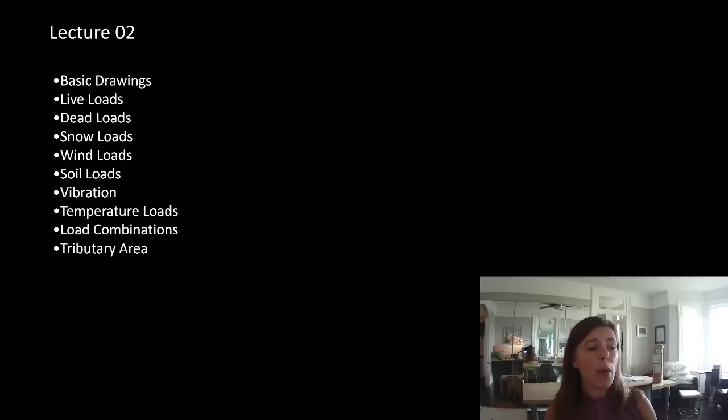So today, we're going to look at the drawings, we're going to look at loads, and then we're also going to look at how we combine those loads to get that load side, or that factored load side of our equation. And then we're going to talk about tributary area and tributary width. So this is basically how much of something loads up another thing. And this is where I think intuitively most of you have a good sense of these things.

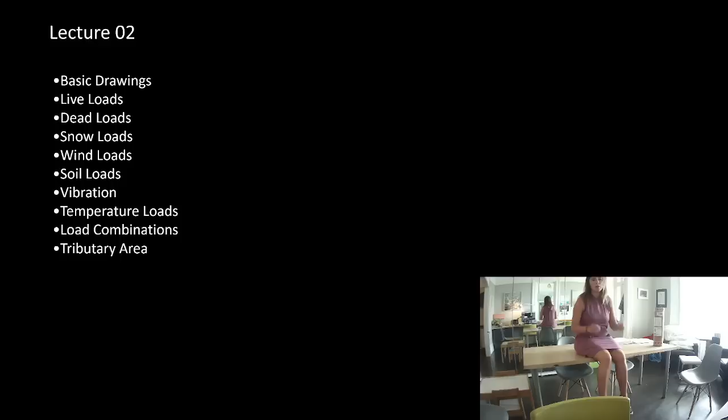For example, I have this table right here. If I asked you what percentage of this table went to this leg, and what percentage went to this leg, and what percentage went to that one, you would know that it's about 25%. You know that if I sat in the middle of this table, half of my load is going to this side, and half of my load is going to this side. You intrinsically and intuitively understand tributary areas and tributary widths.

We're going to talk about that, and we're going to do some quick calculations that look at those. So we are going to do some calculations today, not a lot, but we will do some. So let's start digging in here. So I've already commented on this. I have posted for you Varsity Goldring Centre for High Performance Sport. The architect, MJMA, and Patkau have allowed me to post their drawings for you, and the structural drawings that I did when I was at Blackwell. If you ever get the opportunity, go check out that building.

It's gorgeous. Cube Lofts was done in 2007, and it was a unique project in that we did it out of steel because that was economical and it made sense for that project. We tendered the project, which means we send it out in the world and different contractors say how much it'll take for them to build it. In that 3-month time frame, the steel commodity prices went bananas. Now, that was an unusual circumstance back in the day, but we're seeing that same thing with wood and pretty much all building materials right now.

Then it was because of the Beijing Olympics. A huge portion of structural steel in the world was going to China for mass construction, and the prices in North America for a period of 3 months almost doubled. So we had to redesign the project in concrete. Some small architectural changes happened in that time, but not many. By the time the concrete project was actually tendered, steel had dropped back down and it would have been cheaper to do it in steel. But we have 2 sets of drawings for that project now. So those are all available on Quercus.

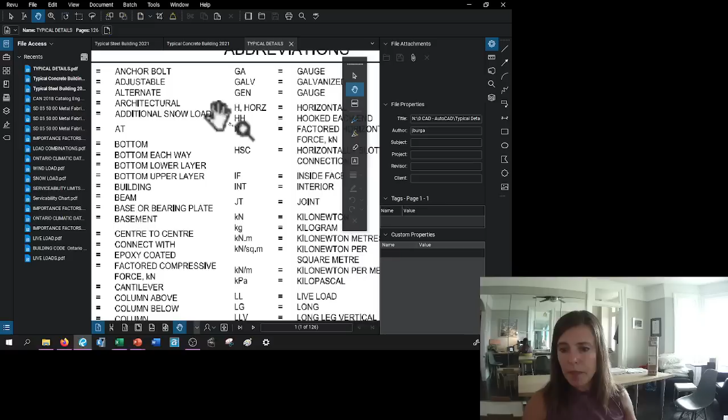So this is my typical details for abbreviations. So you can see that we've got some common abbreviations here. I'm going to go back to our lecture, because I have identified some of the ones that are going to be really important for us in this course. C/C means center to center. So how often does something occur? Or on center, OC.

CANT. is cant, which is the abbreviation for cantilever. CA means column above. GA usually means gauge. KN, kilonewtons, that's going to be a unit of measurement that we are going to talk about in a few minutes. MC is moment connection, or MOM is moment. This is that bending force that we talked about. So if this is bending, it's also called bending moment. So we refer to that bending force as moment.

I realized in last week's lecture, to me, bending and moment are the exact same thing, and in the lecture slides, I referred to it as bending, and then in the assignment, I listed it as moment, and you obviously couldn't have known that, or some of you did know it, some of you did figure it out, but it's not really fair that anyone would be penalized for not knowing that.

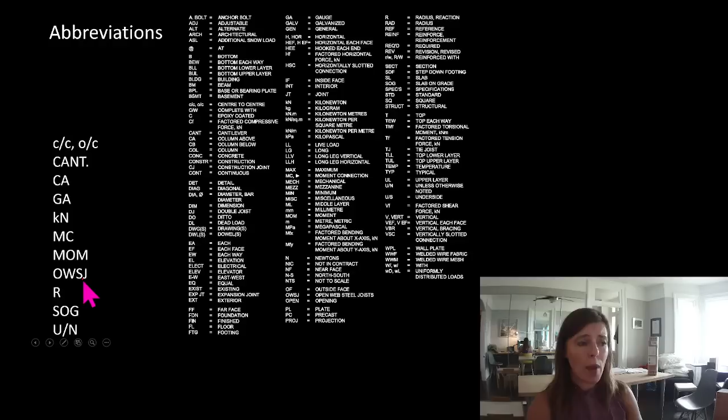Open web steel joist, OWSJ. I'll show you an open web steel joist in just a second. R for reaction. SOG is slab on grade. And U/N usually means unless noted. So we'll say something's typical unless noted.

The ones that are really important in this course: you can see here, this says a big C with the sub F. That is our factored compressive force in kilonewtons quite often. So C for compression, and that sub F means we factored it. Same for MF, that means our moment is factored. We have VF, that's our shear, factored. Any of those with the subscript R means resistance. And this one is tension, so TF is our factored tensile force. We're not going to do torsion, but factored torsional force is listed there.

All right, if we are cutting through something in a section, so if I was looking at a plan of this table, I'm looking down at it, that's a plan drawing. If I have a section, it means I'm cutting through this table. Anywhere I'm cutting, so if I have a section right here, looking that way, I have cut through the table material, but I'm looking at the legs beyond. So anything you cut through, you would hatch it. And hatching it means you draw it in to say that you've cut it. And the hatching can give you an indication of what the thing you're cutting is.

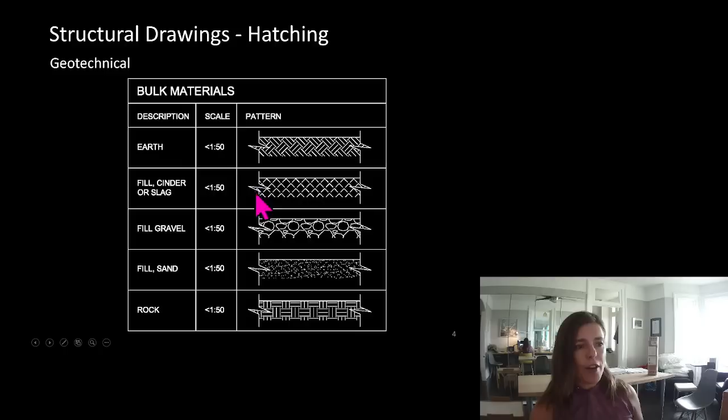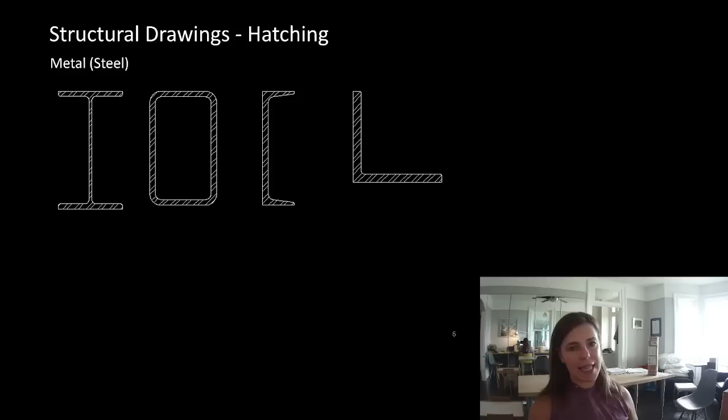Okay, so I have created, I've called it a typical building. It is not a practical building at all. I am definitely not an architect. My building is a very bad plan. It is a very bad idea, but it is structurally sound. I have done an analysis on it, I have a model of it, and I have sized everything, and I have drawn it for you.

So the things I really want you to be aware of, and I'm going to open it up in the PDF, but the things I want you to be looking for: the grid identification, grid dimensions, labels. We label things. What are the size of the elements that make up the building? Remember, the whole point of these drawings is to be able to tell someone how to build the building. I should be able to hand over my set of drawings and walk away and never look back, and somebody should be able to build it.

They should be able to know what me as the engineer and you as the architect came together to draw to be built in the real world. What the framing is, we should be showing the gravity system in plan. We should be showing the lateral load resisting system. What's the lateral load resisting system? That's the thing that stops it from tipping over. And we should be showing the cantilevers. Actually, I just want to see if I have it right here.

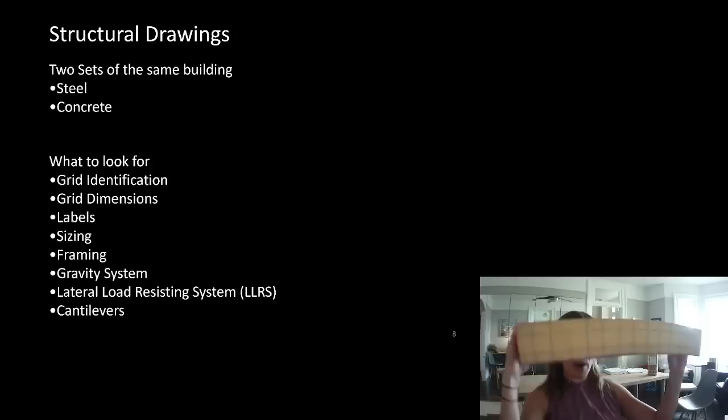And we would often identify cantilevers. So cantilevers are, so this is supported at both ends. This has a cantilever. I've pulled the support back, and this part right here is a cantilever.

All right, let's take a look at our steel drawing. So typical steel building. All right, so this is my steel building that I've created. It's Hilchian Engineering. I have all of the information. I've labeled what it is down here. I've shown what it is, what drawing number it is, and the intent of what I'm showing. Let's come out over here. This is the foundation plan. So if we have a building, for the foundation I am cutting just above the foundation and looking downward.

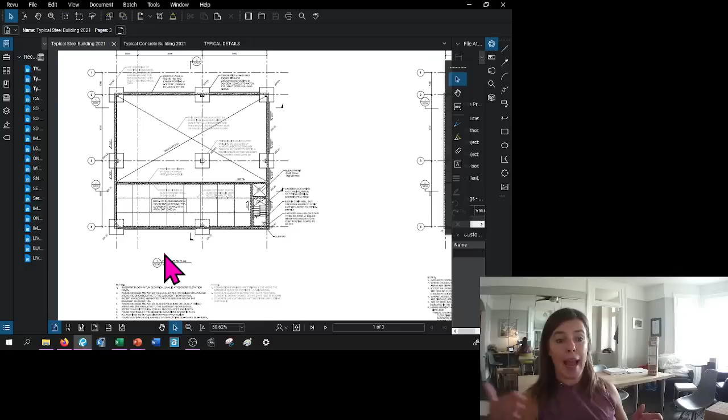Each year I add a little bit to these drawings. You know what, I'm going to flip to a section just to show you what I'm talking about here. My foundation plan is a line right here looking down. My second floor plan will be a line here looking up.

All right, so foundation. I'm cutting just above my foundation and looking down. So there's a huge zone that's unexcavated. It looks like right here we have no basement. We have nothing here, but look at this. Over here, we have a basement right here. So this is a 150 slab on grade. So slab on grade is the thing that sits directly on dirt. We have grids, and we have the dimensions between the grids. We have concrete foundation walls and something showing SDF. That's a step down footing.

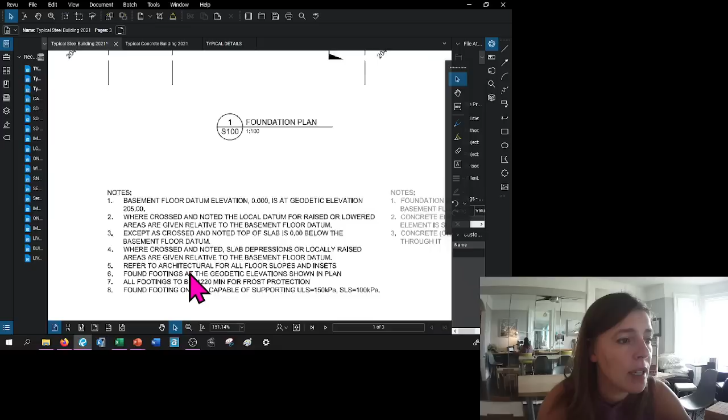We have these foundations here. Let's take a look what it says about our foundations. We have notes down here as well. So found footings at the geodetic elevations shown in plan, all footings to be a minimum 1.22 meters down for frost protection. That is standard in southern Ontario, and we'll talk about that later in the term. But that means these foundations here are down just below grade, about 1.2 meters down.

But these ones need to go down deeper because we have a basement. So we have to dig down deeper. We don't just go along and do a straight line and go down. We have to slowly transition down to that deeper footing. So that is indicated here with a step down footing. So we have piers on footings, and I'm going to show you sections through this, and you should be taking the time to take a look through these.

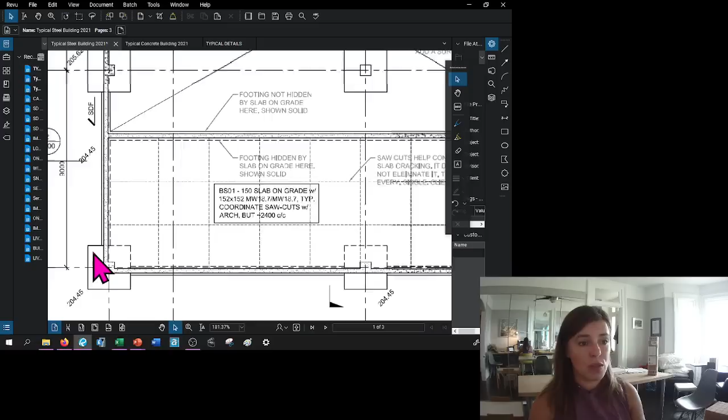You know, the intent is that you're already comfortable and familiar with drawing sets, whether it's architectural or structural. The assumption is already that you can read them. I think that's a bit of an ask to assume that you already know all that. So that's why I'm taking this time to go through this, and that's why I've drawn these drawings. So saw cutting, it's about crack control.

So the dark notes are the things that would normally be on a drawing set. The grayed out notes, or the lighter ones, were ones that I just thought might help you understand what's going on. So I've taken the time to kind of indicate it there to benefit you in some way.

All right, the next plan is our ground floor framing plan. So we're cutting just below the ground floor and looking up. Before we were cutting and looking down, and now we're cutting and looking up at the ground floor. When we were looking at the foundation, there was no basement, so we were cutting through dirt and looking at the foundations, except for where we had a basement and where we had our stairwell going down to the basement and our elevator pit.

Here, we're cutting and looking up at the ground floor, or something called a reflected ceiling plan. So we're cutting through our concrete foundation walls still, so we're still somewhere down in the dirt, but now we're cutting and looking up. We have our elevator here and our stairwell here, and you can see we have doors here because we're cutting through, so we're not cutting through a hatched part anymore because there's a doorway there.

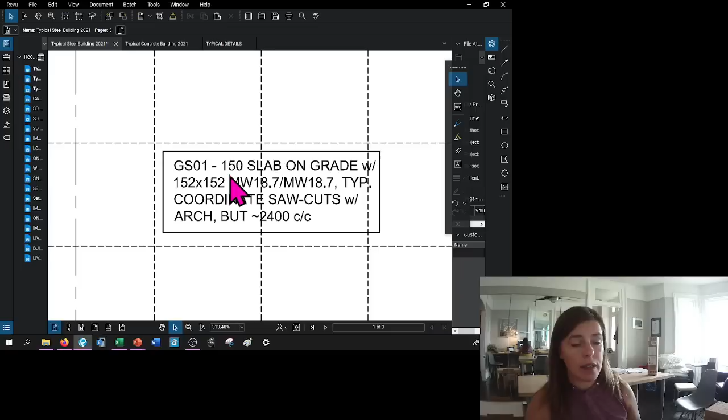All of this zone now is our slab on grade. So that's some concrete sitting right on dirt. It's supported everywhere. So instead of being our table like this, it's if we took the legs off and set it on the ground. It is fully supported everywhere. Over here, above our basement, we have 64 concrete on 38 metal deck.

Now, there's a lot of terms I'm going to throw at you here, and you're not going to know all of this information. We are going to go through each material in a separate week of, I think we spend 2 weeks per each material, where we look at what's typical, what all of these terminologies mean. Right now, I'm just trying to show you a lot of information on the drawings. We're not going to stop and explain it all. This will be helpful when we come back to it, when we start to talk about structural steel.

The idea here, though, is that I've labeled this. The metal deck spans from here to here, and then from here to here, and then from here to here. So it is like, well, you know what? I have a piece of paper right here. I am going to do something that looks very similar to my metal deck. All right. So I've badly folded this piece of paper.

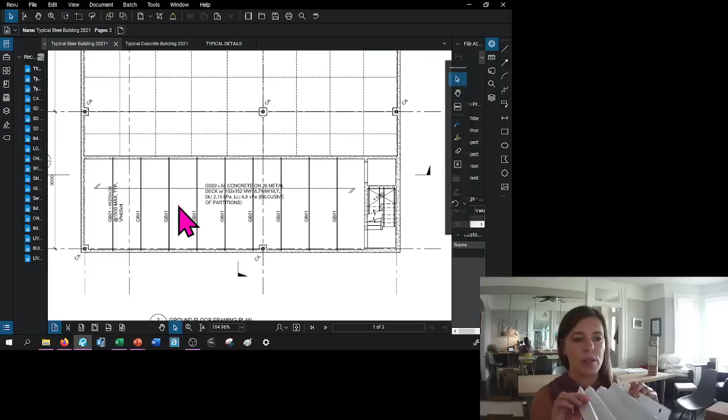Paper by itself doesn't span a very far distance. Paper like this wants to crumple like this. Paper like this, because I folded it, is now very stiff. Look at how far it goes without trying to crumple. Turn it this way and it tries to crumple. That is the idea of metal deck. This is the direction that it spans. So this is matching the arrow here like this.

This deck would get supported on a series of elements. So I'm going to be very weird with this. All right, so the deck would be spanning. All right, so if this is our deck, we would have something here, and something here, and something here, and something here, and something here supporting it.

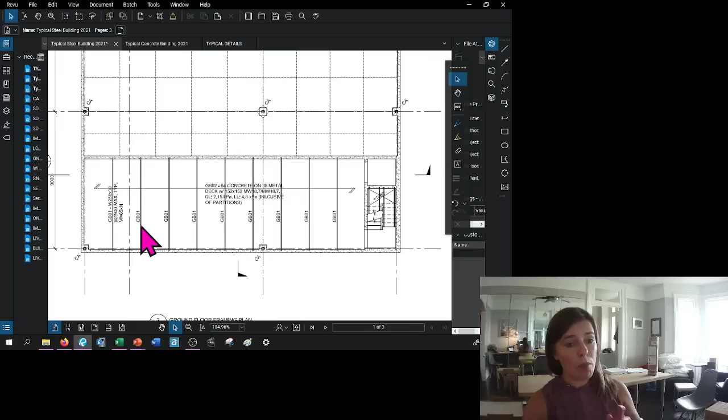So it comes in one big long piece, but if this represents my beam, it is picking up this amount of deck. And this beam here is picking up this amount of deck, because the deck is spanning in this direction. We will talk more about that later today, and again when we talk about each of these specific materials.

So we have notes here. We have a column schedule that shows us our columns. So we have what size it is. We have it labeled. So look at this, A2, column at A2. Let's find where A2 is. So it looks like we're talking about this spot right here. See this CA? That means column above.

So it looks like our steel column starts somewhere around the ground floor and goes up. Let's verify that with our column schedule. Look at this. Oh, our column starts right here, just around the ground floor, and goes up just to level 2.

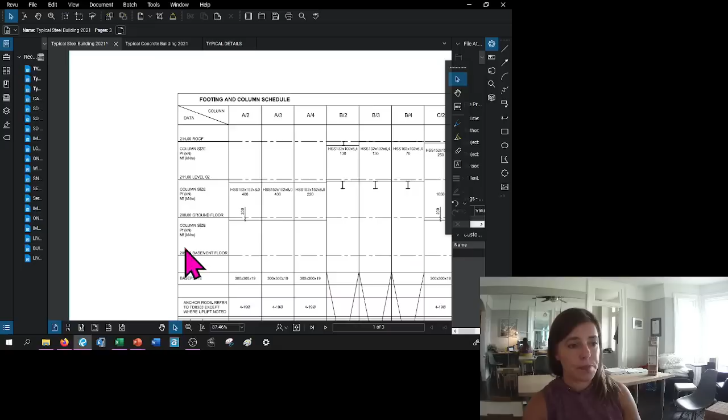So let's look at our second floor plan. So this is cut looking up now. So we have our big space here. We have our elevator and our stairwell here. We have a few things happening here. It looks like we have an outline of our building right here. This dashed line is our architectural line showing us the extent of our building. It looks like this zone here is a roof, and this is a floor. So it looks like this is a low portion on our building.

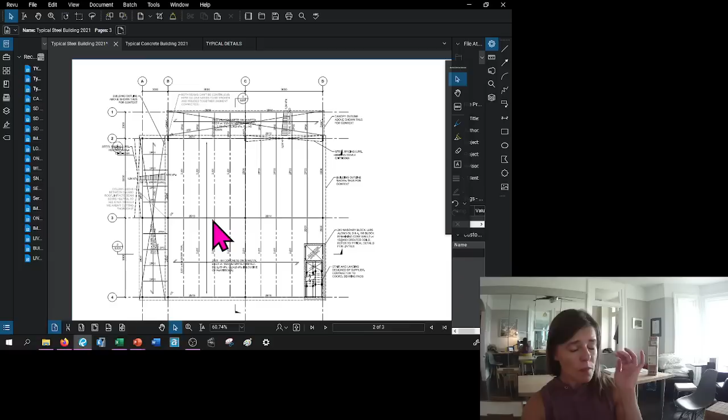We have something here. It looks like this is our snow load. This is representing our snow load. We have beams and something called a purlin here. Ooh, look at this. Column above. That seems like it's going to be messy. We have this 2B13 spanning from one column all the way over to another column with a column above on it. That looks like that beam is doing an extra big hard job. We will reference that when we start talking about how we estimate sizes of things.

Over here, we have something that says 240 masonry block LLRS, or lateral load resisting system. Remember how I said it could be a braced element? Well, it could also be that we have not just something floppy like this. I wonder what are the odds that my calculator, oh, look at this. So my calculator fitting in there stops that from racking as well. Imagine if my calculator fit in there perfectly. It could be a shear wall, or it could act as the lateral load resisting system.

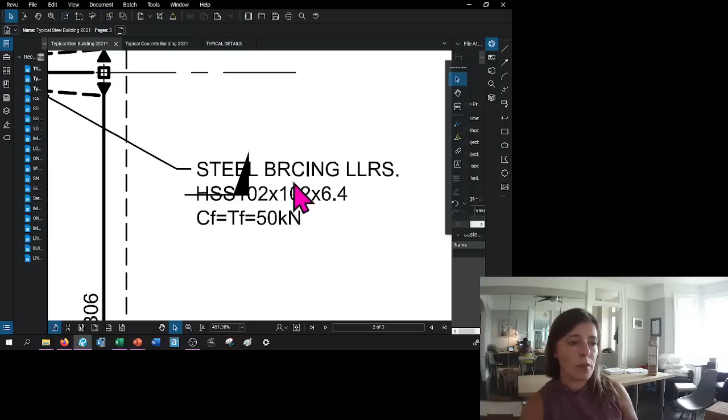So when we build solid walls out of a material that we can use as a lateral load resisting system, we often do that. So plywood on wood framing houses, for example, block and concrete walls in buildings we would use as lateral load resisting systems. It looks like we also have these dashed lines here. This says steel bracing, with bad spelling, lateral load resisting system. And it tells us what size it is. Oh, look at this. CF equals TF equals 50 kilonewtons. Or the factored compressive load equals the tensile factored load equals 50 kilonewtons.

What they're saying is that whatever load is acting on this could go this way, or it could go this way. So if it's trying to go this way, it's going to squish this column, or this brace element. If the load is going that way, it's trying to pull. Oh, look, I actually broke it apart. I actually pulled it apart there. So it's trying to pull it, and that would be our tensile, or our tension factored load.

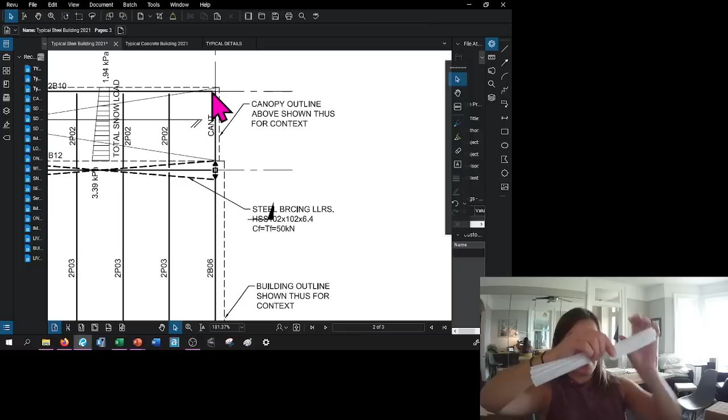See these dark triangles here? That is representing a moment connection. And look, we have CANT, or cantilever. So it looks like this beam comes along, gets moment connected through here, and cantilevers out here. We can do two things. If this is going to represent a beam now, when we have a cantilever, we can continue it over the top of something, and it cantilevers over. Or we can break it apart, and at that point, connect it back together.

Why would we break it apart and connect it back together? Well, sometimes maybe we want that cantilever bit to be a shallower piece, and we need to moment connect it and then support it. That is exactly what's happening here. See this cross line? It says minus 250. This zone here, the underside of the metal deck, is dropped 250 millimeters in this zone.

Again, I know I'm saying a lot of words that you don't know. Take a breath. You don't have to know all these yet. I want you to start hearing them, but you don't have to know them yet.

My 5-year-old has just started French immersion this week. He knows no French.

And so I'm highly aware of how just hearing it get repeated is how you can learn. I'll also take the time to teach you, but I can't teach you everything on day one. So I'm saying a lot of things that you haven't learned yet, but by the time you learn them, they'll already sound familiar.

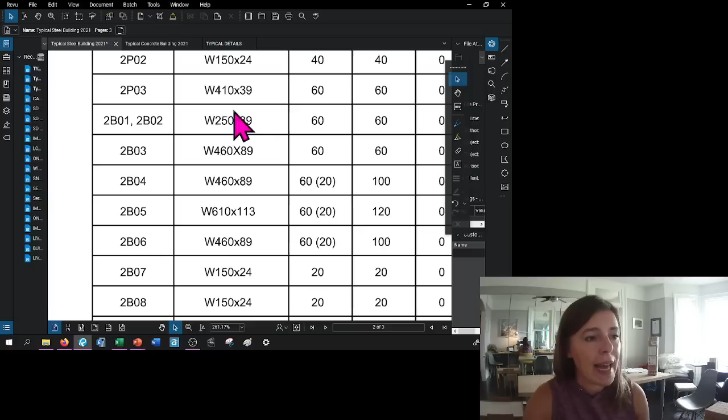All right, we have a beam schedule here. So these are the labels that we have, and they tell us what size section we have here. We're going to talk all about this and what these things mean. Look at this. We have reactions in kilonewtons. And if we look down here, it says design connections for axial force PF, end moment MF, torsion TF, or out-of-plane horizontal forces shown in the remarks column. In addition, the vertical shear is provided in the reaction column. And so these are all factored values.

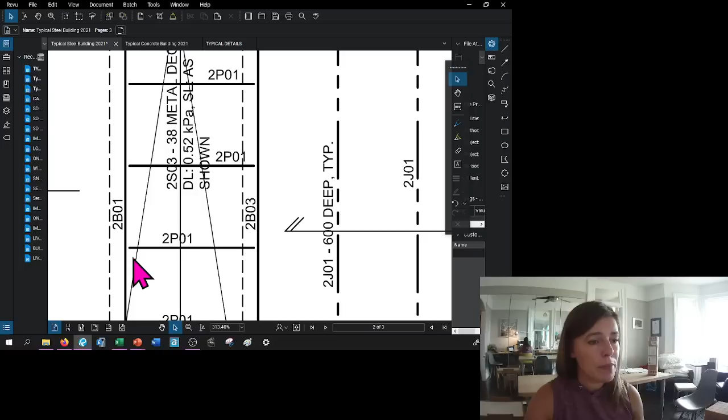And so this says 2P01 is a W150 by 24. Let's go find our 2P01. Oh, look at this. This is an element that spans from 2B01 to 2B03. It looks like it's supporting metal deck that spans in that direction.

Here we have our roof plan. So we have RJ01. See this funny dashing? We have a double dash. That is often the dashing we use for joists or open web steel joists. And I'm going to show you what that is in just a minute.

So take the time, look through these drawings, read them. I'm not going to go through every single thing. What I have added this year is sections. So if you go back, you can see this is a section mark, so I'm cutting through the building, looking that way. I'm cutting through the building, looking that way. Here are those sections.

So you can see this is the one where we had our ground floor or our foundation cut looking down, and then we cut looking up, we cut looking up, and we cut looking up. We have our next section where we actually cut through the elevator core. And you can see we have an elevator pit here that we called up on the plans.

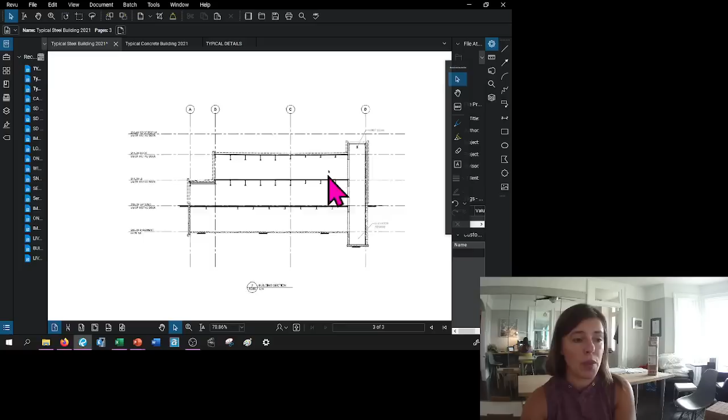And here's one where I show that moment connection through that column where we have a cantilever. So nothing picks up the end of this. So if we have nothing picking up the end of it, it can't be just a pin. It tries to fall over. We need something that grips it and stops it from trying to rotate or spin in space. And that's our moment connection here. But we couldn't just bring this one beam across because we needed it to drop down.

Here's our basement. There's the slab on grade that we had at ground level. Here is our concrete on metal deck and beams that we had at the ground level over a basement. And here are our open web steel joists. So these are at some regular spacing. And this is what an open web steel joist looks like. We're going to talk about all of these when we look at steel.

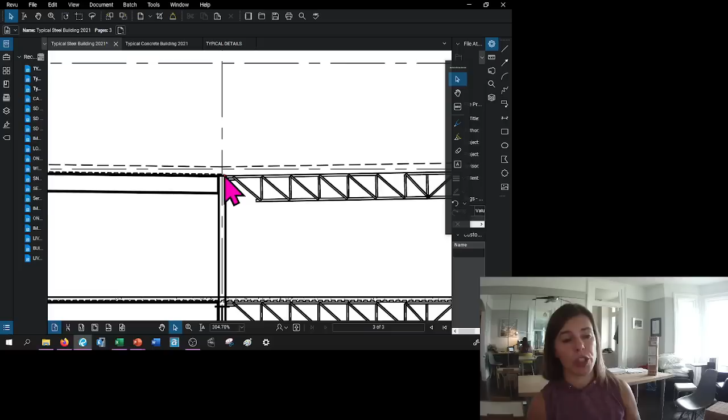You can see this open web steel joist and this beam are sloped down to a point. If we can, and it's simple, we will slope the top of the structure to help the architect to achieve their roof drains. Water wants to go to the lowest point, and so we build that in. And I'll talk about that a little bit when we get to loads as well. So that's our steel set of drawings. You can feel free to go through this on your own and take a look at them.

This is the same building as a concrete building. I will point out that with the steel, what we often do is we make our grid lines run through the center of our steel. It makes detailing and coordinating so much easier, and we reference everything out from that. Concrete will often bound the edges of the structure with our grid line. So here in the center, no problem, we go through the center of our column. But at the edges of the building, our grid line often aligns with the outside edge of our structural elements.

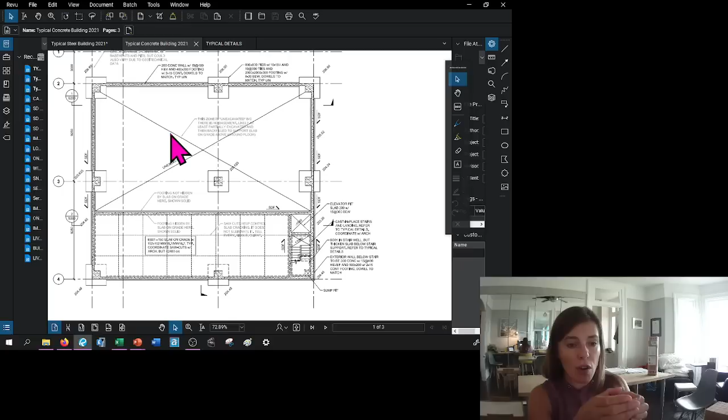Here is our ground floor plan where we're cutting just above the foundation and looking down. Most of it looks the same for this building. Our pier is a little bit bigger because we're picking up a concrete column above, not a little steel column. But for the most part, this plan is the same. Even this one looks similar, but instead of CA saying column above, we can see that we have something else up there. We have a concrete column up above. The slab on grade is the same.

Instead of having metal deck on beams that then span to the edges, we have a one-way slab, or a cast-in-place concrete floor. It spans from here to here. Basically, we would have rebar going in this direction doing the majority of the work.

Here is our level 2 plan, so we're cutting just below level 2 and looking up. Instead of masonry as our shear wall here, we have concrete. If you're building a concrete building, you're not going to take the time to do a masonry wall. We have a concrete building, so we're going to cast concrete cores for this.

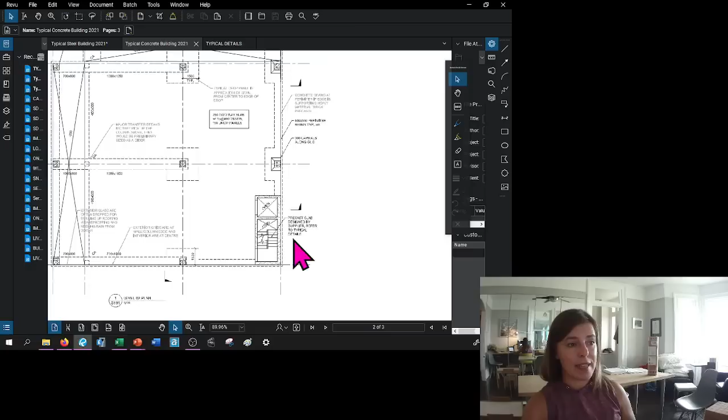We have our column above here, same as we did before. So that means we need a major transfer concrete beam. One of my spelling mistakes. They would be preliminary sized as a girder. We're going to talk about what a girder means in a few weeks. We have our dropped down area for our balcony, and we have our dropped down area for our low roof.

Here is our high roof, and we have drop panels, and we had capitals over here. So that is all about shear. I'll show you what that looks like in section. Let's go to our sections. So a drop panel, I'm going to go through one. Okay, so here is the outline of our major transfer beam picking up this column, and here is our drop panel. This section is just before cutting through these beams and drop panels.

So we're seeing the beam, we're cutting through the slab, and we're cutting through this beam, and we can see the beam parallel to our section beyond, and our columns beyond, and our drop panel beyond. So again, these are here as a reference.

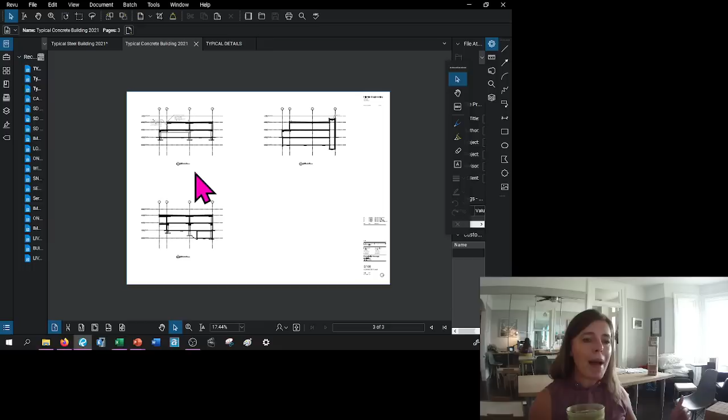This was just supposed to be a quick intro. The idea is that you're supposed to know all of this, but I don't really think it's fair. So I've made these. You can go back and take a look. And sometimes, if you're really having a hard time understanding what I'm talking about, go back and take a look at these drawings. It might make it clear what we're trying to do with our structure.

The last thing I have in here is our typical details. So I already showed you the abbreviation typical detail. I have provided you with 126 typical details that you can take a look at. If you want to see how things normally go together, and that's the idea behind typical details, it means it's typical, it's normal, it is what is done the majority of the time. You can go through and take a look.

Let's just pick a random page here. Let's go to page 50. Well, that one's a somewhat unusual one still. I want to get to one. Okay, so here is a concrete column. You can see that we have the reinforcing in our column. They're talking about how it's reinforced.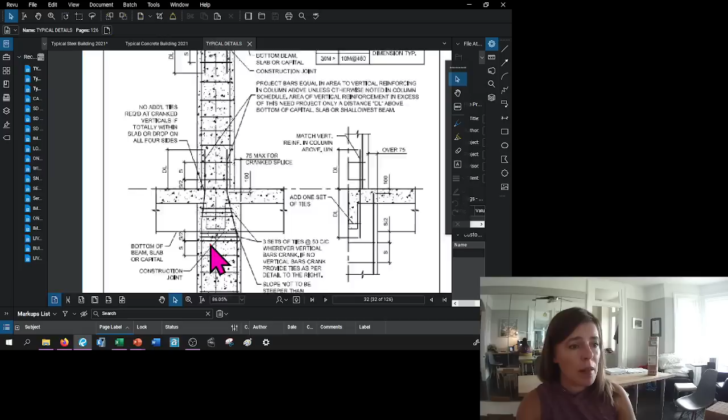There's bottom of a beam beyond, or the slab, or the capital, that's beyond. So that could be a drop panel. So I drew mine dashed just so it didn't draw the eye away. They drew it as a solid line here, but we're cutting through everything hatched, looking at something beyond. So this is really where we might get into some more refined details of those things.

And then we would also have sections through our building. So each year I'm adding a little bit, so next year I'll probably add 2 or 3 sections around the building of my typical, not typical building. Let's go a little bit farther, maybe we can get into the steel ones.

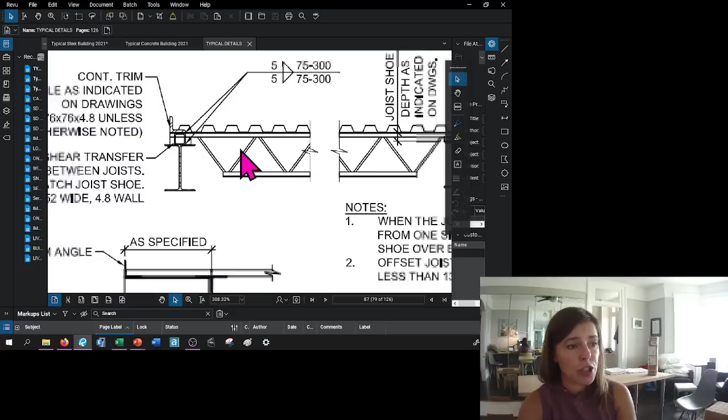Okay, so here we're in steel. Look at this, we have steel deck framing. We have steel beams with open web steel joists. We have steel beams with metal deck on it. So steel beams with metal deck on it are tucked up tight to the underside of the metal deck. Steel beams that are picking up open web steel joists get dropped for a joist shoe. So you can see here that we have something called a joist shoe. And so beams that are picking up a joist get dropped a little bit.

Let's just go take a look. I'm going to go back to my beam schedule. It looks like this 2B13 is picking up open web steel joists. Let's look at my beam schedule for 2B13. 2B13 was a W610 by 153. These are our reactions. And see this minus 100 here? The top of beam is down 100 millimeters from where you would normally put a top of beam because it's picking up the joists.

We have a lot to cover today, and I do want to do a few examples. We're probably going to go right to the end of our 2 hours today. There will be a lot of lectures where we're not the full 2 hours at all, and there's 1 or 2 where we might go 5 minutes over. That said, if we go over, it's because we have a lot of examples, and the people that don't need all of the examples don't need to listen to all of it, but for the people that really benefit from it, think of it as me providing you with extra resources. So not all of it is required in the lecture time slot, but I've added in places where I see that people who maybe struggle with certain things could use a little bit of benefit.

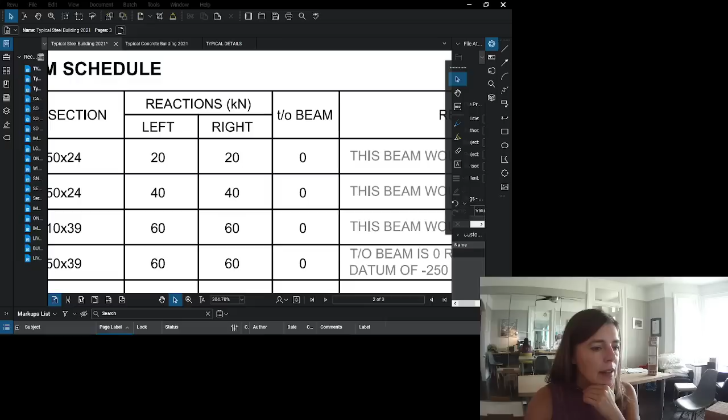Let me bring our lecture back up. So we have assemblies, we have all kinds of different types of buildings. The live loads, really, I looked them up in a book. In fact, I believe the book is sitting right here. This one is the National Building Code of Canada, but it's the same idea for the Ontario Building Code. It's actually two binders. Two of these is the code that we're talking about. And within that is where that table came from.

You and the client are designating the use of the building. And based on that use, I can then pick from that table what live load is the applicable live load. So before we talk about what the live load is, let's talk about what a kilonewton means. So what does a kilonewton mean? A kilonewton is 225 pounds, thereabouts. It's pretty darn close to 225 pounds. It's like 224 point something, but 225 will do for our use this term.

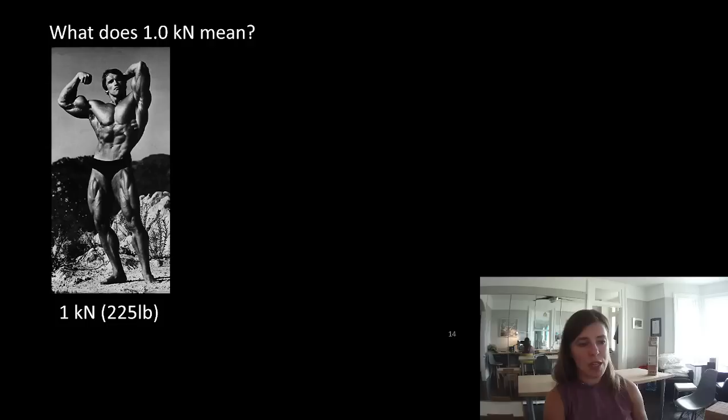This guy weighs almost exactly 1 kilonewton. I went through to try to find other people that I could use. Channing Tatum, he's a little dude. He's super muscly, but he does not weigh 225 pounds. I tried The Rock, and he's huge. He weighs way more than 225 pounds. So we're going to stick with Arnold as our representation of 225 pounds.

This person, I am not in touch with anything. The last supermodel I was ever aware of is Kate Moss, and she was around 112 pounds. I in no means endorse the culture of supermodels starving themselves. I feel strongly that supermodels should weigh a lot more than this. They shouldn't weigh half a kilonewton, but we're going to use this as our resource at the moment. So Arnold is 1 kilonewton, and our supermodel is half a kilonewton.

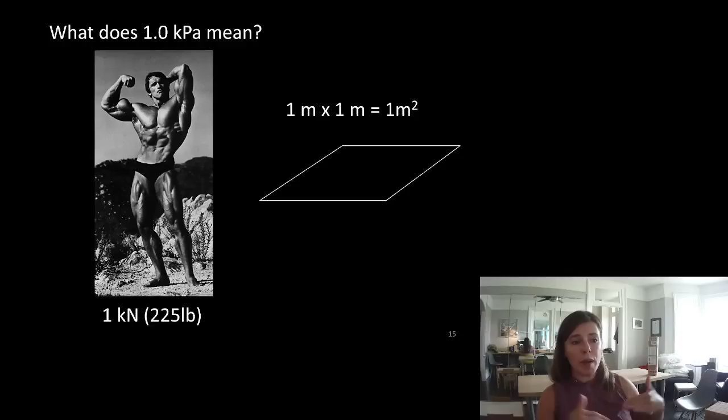Me and some of my hockey pals, let's say we all add up to 2.44 kilonewtons, something like that. So you can see that if you know it in pounds, you can convert it to kilonewtons. What does 1 kPa mean? Well, a kPa is 1 kilonewton per meter squared. So if you take that 1 kilonewton load and spread it out over 1 meter by 1 meter squared, you've got 1 kilonewton per square meter, or 1 kPa. So if we take Arnold and put him over 1 meter by 1 meter squared, we have 1 kPa.

If we wanted to achieve 1 kPa with the supermodel, that one supermodel over a 1 meter by 1 meter, she was half a kilonewton over 1 meter by 1 meter squared, giving us half of a kPa. 2 supermodels, or 1/2 of a kilonewton plus 1/2 of a kilonewton over 1 meter by 1 meter squared gives us our 1 kPa. So that's what we're saying. We're saying we have a load and we're spreading it out over an area. Or every 1 meter by 1 meter zone can take that many kilonewtons, or needs to be designed to take that many kilonewtons.

An assembly area is 4.8 kPa. So we're saying 4.8 kilonewtons needs to be over that 1 meter by 1 meter squared. We need to be able to support 4.8 kilonewtons on every 1 meter by 1 meter area of that floor. So if we have 5 of these squares, well, each one needs to be able to support 4.8 kilonewtons, and so we'd be supporting 5 times 4.8 kilonewtons, or 24 kilonewtons. So we have 4.8 kPa over 1 meter by 1 meter.

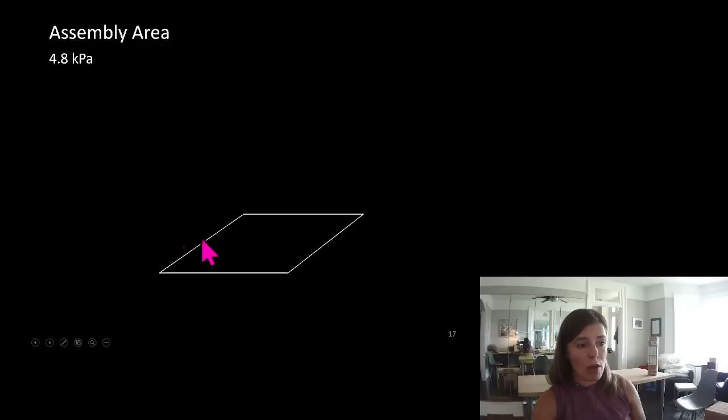That is 4.8 Arnolds over 1 meter by 1 meter squared. If we were talking about our supermodel, we would need 9.6 of our supermodels, because remember, they weigh half of a kilonewton. So we have 9.6 times half a kilonewton would equal our 4.8 kPa. So we need to be able to design this floor so that every 1 meter by 1 meter section could support 4.8 Arnolds or 9.6 of this particular supermodel. That's what we're talking about. That's what we need to support when we're talking about an assembly load.

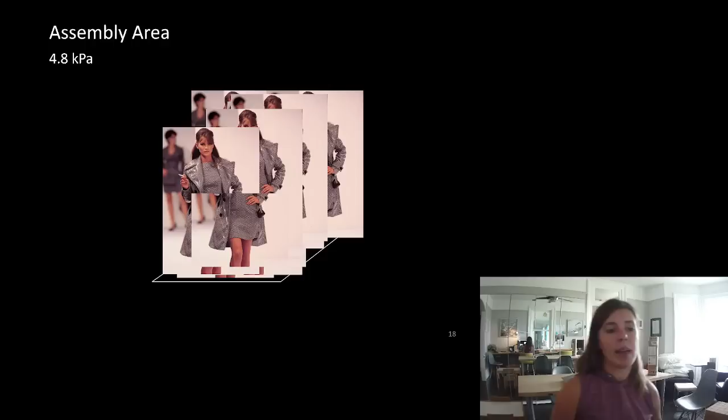This is pretty much an assembly load right there. I often say, is this comfortable? When we taught in person, at the beginning of this lecture, I would tape off a 1 meter by 1 meter square on the floor. And before I'd start the lecture, I would ask 3 or 4 other students to come up, so 5 people in the 1 meter by 1 meter square. It was tight. It was a little awkward, but not too bad.

And then I would say, okay, but I don't think any of us actually weigh 225 pounds. Probably the average of us was each like 150 or 175, somewhere in that range. So I would say, let's bring up 2 more people. So 7 people in that 1 meter by 1 meter area. And it's tight. It's not a comfortable way to stand. And this was pre-COVID, where it's illegal to do that now. It is a tight spacing.

So 4.8 kPa is an extreme load. It isn't the norm, but if anyone remembers what it was like to take the subway, or if anyone was here when the Raptors won, you know that it is not the norm, but it is achievable. We're not comfortable in that spacing. We don't love it, but it happens enough in certain buildings that we have to be able to design for those loads.

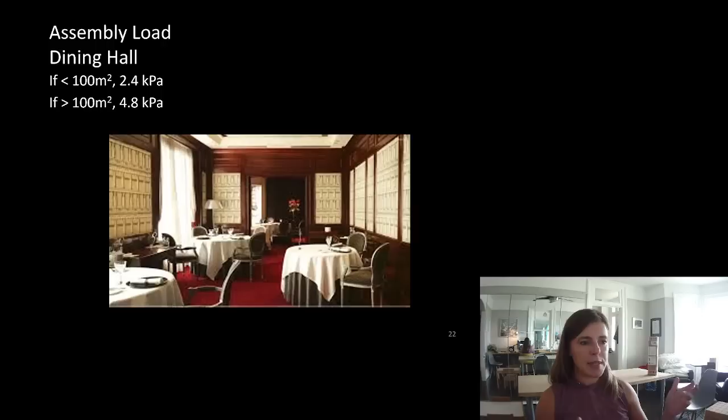And why that difference? Well, I have been in several dining halls where you sit, you eat dinner, and then you go outside, you take some pictures, and you come back, they've cleared the tables, and the DJ is playing the music now. And in that situation, if it's a big enough room, if you play music, they will come. So you need to design those ones to support 4.8 kPa of live load.

Non-assembly areas. So an office building is a really good example of that. For an office building, we do 2.4 kPa on the upper floors and 4.8 on the lower floor. We consider it not an assembly area though. That is because, well, I'm not going to get into it. There are times where we use the criteria of whether it's assembly or not to apply other factors to things. That goes beyond what we're going to do in this course. If you stick around and join my graduate program, we will talk more about that. But we're not going to go into that differentiation right now.

You will come across in the assignment and the quiz some other listings on what you should pull from that assembly load. Don't go rogue. Don't look up your own lists on the internet. Every code is different, and we are using the Ontario Building Code and the list I provided you. You should not be looking up what it is in other places, because 4.8 translates almost perfectly to 100 pounds per square foot, which is how we used to design, in Imperial. The codes that were developed straight up in metric the very first time use 5 kPa quite often. So we had to pick a code.

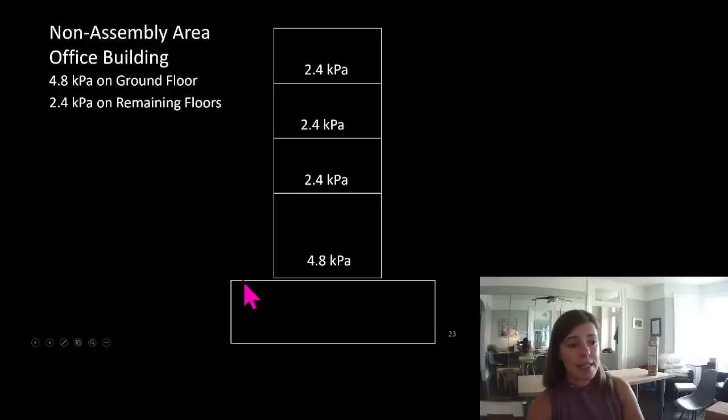Why would we worry about 4.8 kPa? Normally we have foundations and this would be a slab on grade. Who cares if this is such a high load here? It's sitting right on the soil. Well, for a lot of these office buildings, especially in downtown Toronto, some of you might have taken the PATH system, where what we have is a big open area under our building. And sometimes our building setbacks are just for what's above grade. Below grade, you can usually go right to the property line. So this needs to be able to support 4.8 kPa.

Residential live loads. When I first started teaching this course, residential live loads had two categories. Bedrooms were 1.4 kPa, and all the rest of the house was 1.9 kPa. I don't know what studies and research they did, but in 2012, they increased bedrooms to match the rest of residential live loads at 1.9 kPa.

Vehicles have a live load associated with them. So parking garages, that makes sense. We'd have cars with 2.4 kPa. Parking garages with buses and light trucks, 6.0 kPa. Parking garages with heavy trucks would be 12 kPa, so something like a fire truck. Driveways and sidewalk areas and basements, 12 kPa.

Why would we want a vehicle allowance for driveways and sidewalks? They're right on the ground. Well, when we look at soil loads, we'll talk about that. But if any of you have ever dug a hole in the sand at the beach or in the dirt or in a playground, and your pesky sibling has come along and stood on the edge of that hole, the soil tries to fall into that hole. It was perfect, it wasn't trying to go into that hole, but you put a surcharge load on it, or a load right beside it, and the soil tries to go into that hole.

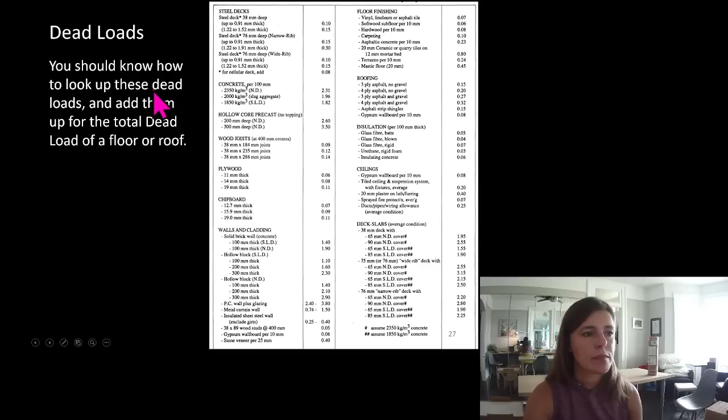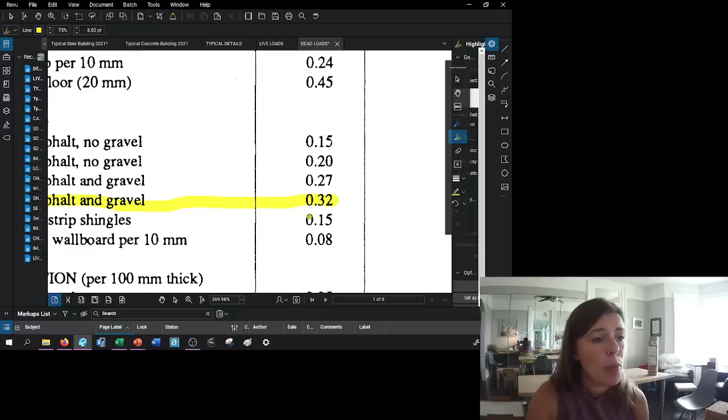So 4-ply with gravel. You know what I'm gonna do? I'm gonna open it in this. So let's make this as much of my screen as I can. We'll look at this section. Roofing. We have 3-ply asphalt with no gravel, 4-ply with no gravel, that's not right. Oh, 4-ply asphalt and gravel. It looks like that weighs 0.32 kPa. Okay, so that's part of it.

6 inches of rigid insulation. Let's go back to this. It looks like we have an insulation section right here. So insulation per 100 millimeters thick. Well, we have glass fiber rigid insulation. If it was rigid foam, I'd specify that for you. So we have 100 millimeters. They told us we had 6 inches. Well, 4 inches is about 100 millimeters. We have about 150 millimeters.

So if you guys remember, an inch is 25.4 millimeters. So our 6 inches times 25.4 equals 152.4 millimeters. Every 100 millimeters weighs 0.07 kPa. We need basically 1.52 times this, or 152.4 divided by 100 times 0.07. Or maybe I could write it out here. It's a little bit hard to see because I'm looking at multiple screens.

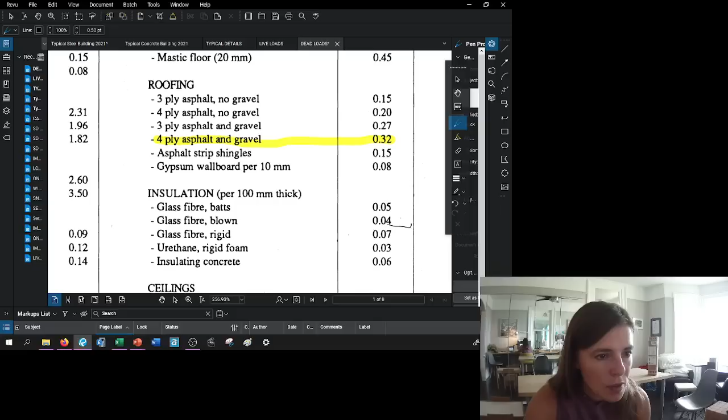0.10. Okay, and then let's look at our slide again. 38 metal deck. Okay, let's go to our,

I'm gonna use my highlighter. Sorry, my screen that I'm looking at over here is absolutely fried. So I'm trying to look at the wrong screen to do this.

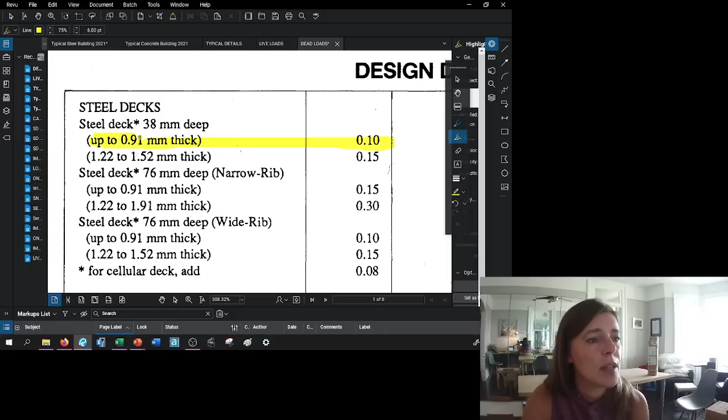Okay. Steel deck, 38 millimeters deep. There's two different thicknesses. I'm going to tell you that this top one is normal. This is normal. So we've got 0.1 kPa for our metal deck. All right, let's see our next thing.

Open web steel joists. Ooh, this one's a pain in the butt. We don't know. We haven't designed it yet. We can't know what it weighs to design it until we've designed it and know what it weighs. So what we often do is make a reasonable assumption. I won't make you pick that. I will tell you what to use there. So I am going to tell you a reasonable amount to use for the open web steel joists, and we're going to assume 0.15 kPa.

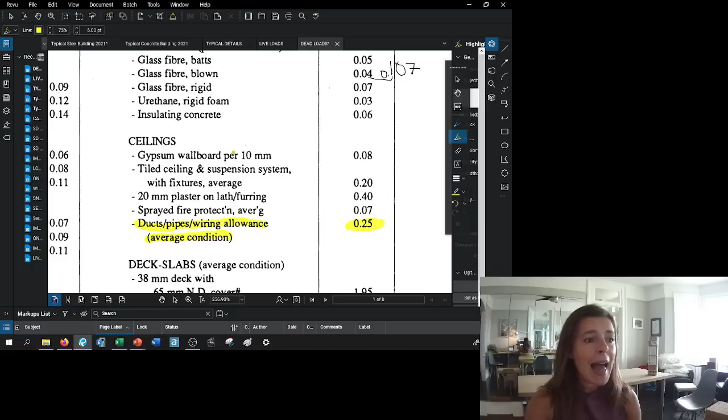Same with the steel. We don't know what steel members we're using to know how much they weigh to be able to use their weight in our design. So we're going to say that it is 0.2 kPa for our weight of steel. Mechanical and electrical. Let's go back to our PDF here. So let's take a look at this. Ducts, pipes, wiring, allowance, average condition. So that's all of our mechanical, is our ducts and pipes, and our electrical, which is our wiring. 0.25 kPa.

And then the last thing that it had listed there was the suspended ceiling. So let's take a look. Tiled ceiling and suspension system with fixtures, average. So this is your normal crappy dropped T-bar system. If you've been anywhere kind of institutional recently, you've probably seen that style of ceiling. And it is 0.2 kPa. So we have our 0.32, our 0.11, our 0.2, our 0.25, our 0.1, and then the 0.15 and the 0.2 that I told you to use.

Let's go back and write those out. Oh, come on, mouse. Here we go. Okay. So let's take a look. We have our 0.32 for our 4-ply gravel, our 6 inches of rigid insulation. I suppose we could have rounded up or down there. If I had used 150 directly instead of 100 times our 0.07, I would have rounded down there. If this is something like this in the assignment, I'm going to make a note to myself to double check the rounding.

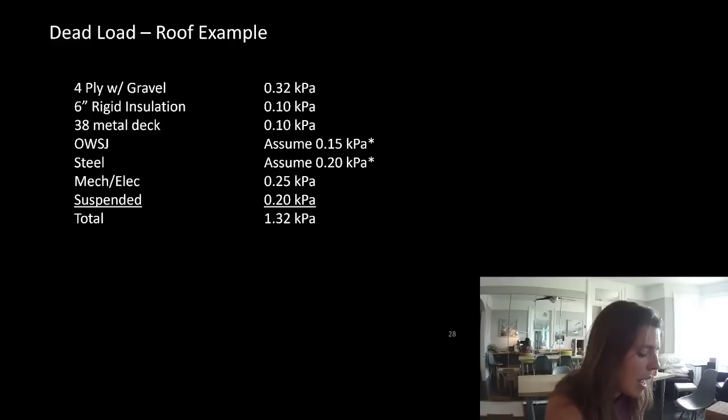I always go through and check everything assumed rounded down, where we have the option to round, and everything assumed rounding up. I look at that boundary and I build that buffer into the answer. I would put this answer as 1.32 plus minus 0.01. So that if somebody had rounded up with this and it was 0.11, they would still get the right answer. So we have all of these elements that we've added up, and we can figure out the total dead load to use on our roof.

Don't worry about this. The thought here is that the deck is sitting on top of the open web steel joists and the steel. So it isn't supporting the open web steel joists and the steel, or the mechanical or electrical, or the suspended ceiling. It is supporting itself, the rigid insulation, and the roofing material. So the deck, as much as our steel members would be designed for the total load, our deck would only be designed for this load.

Our open web steel joists are supporting the metal deck, which is supporting the insulation and the gravel, and the mechanical and electrical would be hung off of the joists, and the suspended ceiling would be hung off of the joists. The open web steel joist would not support the steel. The open web steel joist sits on the steel. So it would be designed for 1.12 kPa.

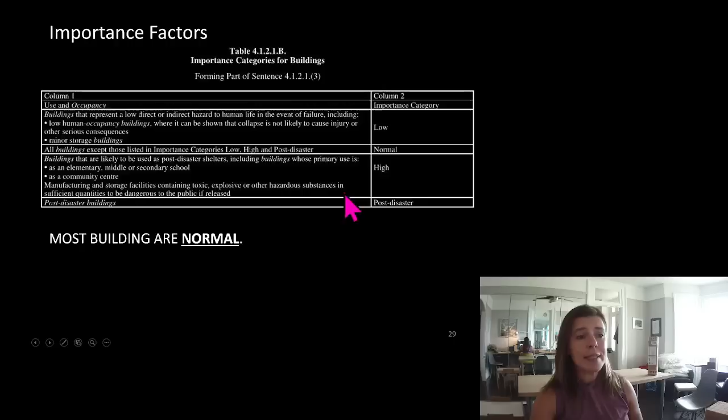Other things that might be would be communication centers or communication hubs. Post-disaster, radio communication, television communication and cell service are very, very important. So those are also considered post-disaster. I'm going to tell you that unless I tell you otherwise, you are going with a normal importance building.

What are the importance factors? I have gathered them up from the different sections in the code because wind is broken out, snow is broken out, and seismic is broken out. I've pulled them out for you and assembled them in this table. This table is also available on Quercus, so you can download this as a PDF as well. Low, don't even think about it. Most of the time, it's regular. We are going to put a 1 in front of everything that we're designing for strength.

If it's high importance, so that means maybe a community center or a school where people would gather after a disaster, we would say wind, we're going to increase the load by 15%. Snow, we're going to increase by 15%. Seismic, we're going to increase by 30%. Post-disaster, we go up even more. We also have importance factors for serviceability.

So look at this: strength, ULS, ultimate limit states design. Deflection and serviceability, serviceability limit states. So this, strength, life safety. We want people to survive, so we're factoring these things up. Deflection and serviceability, that's not about life safety. That's either about people's comfort level or it's about preservation of finishes.

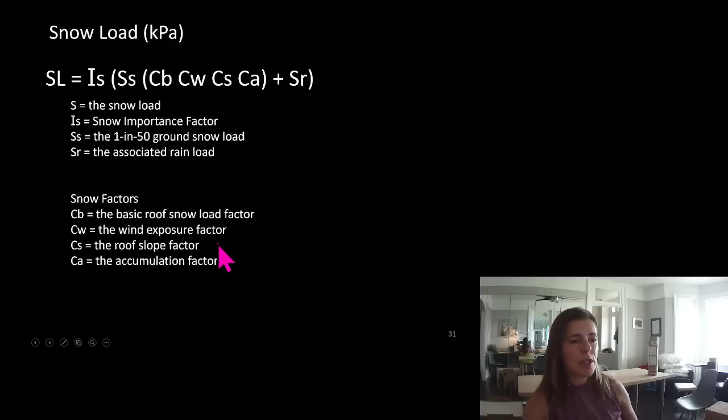CW is the wind exposure factor. Actually, let's flip to the next slide. So CB, the basic snow load factor. It is 0.8 for all Part 4 buildings. We are doing Part 4 buildings. We are not looking at Part 9 buildings. Part 9 is a section of the code where we don't really do a lot of design. It is mostly pulled from tables and lists and is usually applicable to small-scale residential construction.

Why do I put this in here? Why do I even list it? Because it exists and people ask me about it. What I don't want you to do is use 0.6 as your CB value. In spite of me saying, whatever you do, don't use this, people will use it in their calculations and get the wrong answer. In the grad course, I show this same slide, and people do it in their final project, where they have to just calculate the snow load, and they get it wrong, because they use the thing that says does not apply to this class. And I am truly baffled by it. This one is what we are going to use 100% of the time in this course. We're going to use 0.8.

CW is the exposure factor. This says if our building has snow on the roof, if it's a really windy spot because there's nothing else around it, some of that snow is going to blow off the roof. Again, 1 is typical. 0.75 is when we're exposed to winds on all sides.

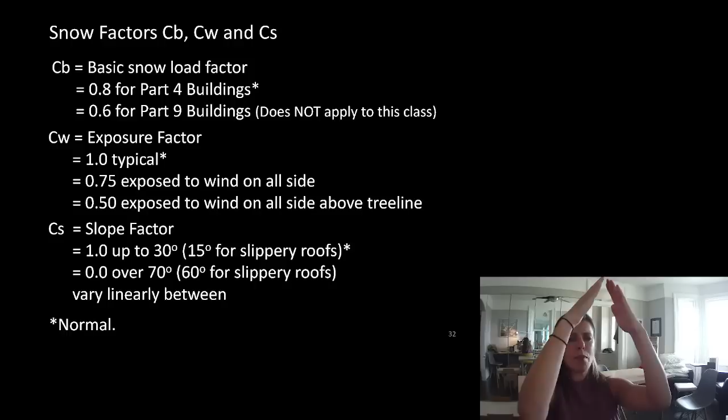In Ontario, the loss of space you get that you have to heat and do stuff with to diminish our snow loads isn't worth it. People get all excited saying, I'm going to make an A-frame here in southern Ontario. Well, the cost of the extra material to do that doesn't gain us anything versus dropping the snow off the roof. It actually ends up costing more.

In northern regions or mountainous regions where the snow loads are much, much higher, there's an advantage to trying to build a structure that forces the snow to fall off. In fact, that's the idea behind kind of the onion domes in Russia.

So, SS and SR, I said these are 1 in 50 year probability occurrences, and we look it up in the climatic data. So this is published information. We look up SS and SR, and I've provided that for you. Here, for example, is Toronto City Hall. Snow load kPa 1 in 50 years. SS is 0.9, SR is 0.4.

There was one more factor that we didn't talk about, and that's the accumulated snow load factor. We are not going to use it. We are going to say that it is 1. For everything we do in this course, our accumulated snow load factor, or our CA, is 1. We're just not going to worry about it.

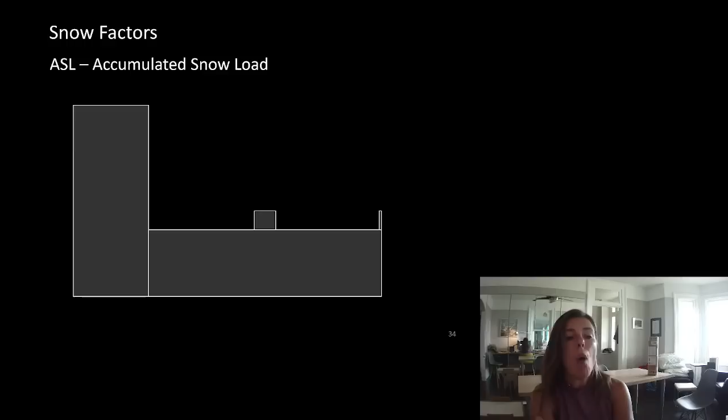But why would we have an increase in snow load? Well, if this is our snow falling flat on the ground, no problem. Sitting on top of our roof, we've applied our CB factor of 0.8. So remember, that's our basic roof factor. We have a flat roof, so our slope factor is 1. We have other buildings around. There's some trees right here, so our CW factor is 1.

If I was going to make you do this, this is why we would use something different than 1. You've all seen this. Beside a higher building, you get snow accumulation. Around a mechanical unit, you get snow accumulation. Beside a parapet, you get snow accumulation. So all of those would cause snow accumulation.

Do you guys remember in that typical steel and concrete drawing I showed you, we had a varying sloped snow load? Well, that's because it was a low roof beside a high roof, and we had this condition of snow load buildup on that low roof. So let's do an example. What is the snow load on the flat roof of a Toronto condo if there are no buildings taller than it nearby?

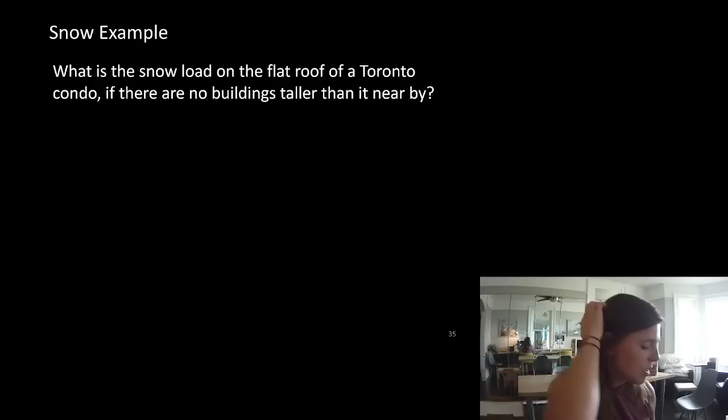So, let's see how handily this is going to go. I purposely bought this new stand so that I could do this easily. And this is the first test of how easy it is.

Okay, so we know it's in Toronto and it's a condo and there's no buildings taller than it nearby. Let's make my paper bigger here.

Okay, so we have a building in, oh, Dave has used this pen. He ruins my pens. Oh, he's ruined this one too. Let me get a better, maybe I've hidden this one well enough. Ah, he's ruined this one too. I have to get out a brand new one. Okay.

All right, so we have a building in Toronto. We know that the equation for snow load is snow load equals the importance factor for snow times SS, which is our 1 in 50 year probability event, times CB times our CW times our CS times our CA plus SR, and then that's inside that bracket. So there's 2 layers of brackets here. Remember your order of operations. Let's figure out what these values are.

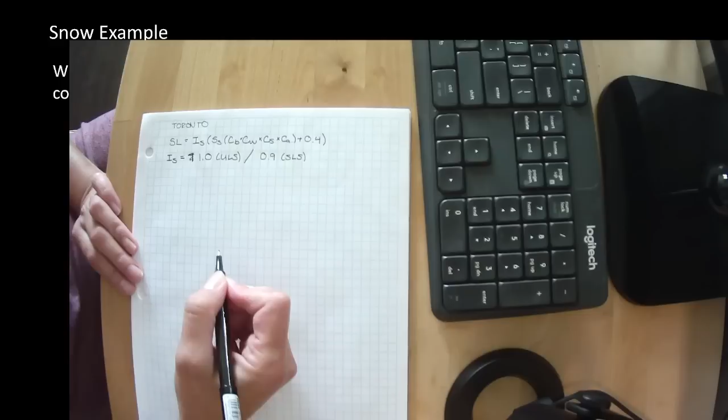IS. Well, that's the importance factor. You know that this is just a regular old condo. Why would we think that it would be anything else? So it is 1.0 for ULS. Remember, we had 2 different importance factors. We saw for serviceability, though, the importance factor for snow was 0.9. So we have 2 different importance factors. So we probably have 2 different things we need to calculate. Snow load for strength and snow load for serviceability.

Well, the snow load that we looked up in the climatic data tables for Toronto, we just saw it, and this is City Hall. There's nothing telling us otherwise. We're going to assume it's not Scarborough, it's not North York, it's not Etobicoke. We've got Toronto, good old Toronto, right downtown. They told us that it was 0.9 kPa, and also in that we had our associated rain value. So not rainfall value, but our associated rain value as 0.4 kPa.

CB, we know, is 0.8. I've told you, don't use anything else. CW is our wind, basically wind scour. What are the odds that the wind's going to blow it all away? I've told you, it's almost always 1. CS is our slope factor. Well, we've got a flat old roof here, so it's 1.

And CA, well, it said in the question that there are no buildings taller than it beside it, so we can't have accumulated snow loads. That doesn't mean this is 0, that means this is 1. So let's calculate our snow load for ultimate limit states.

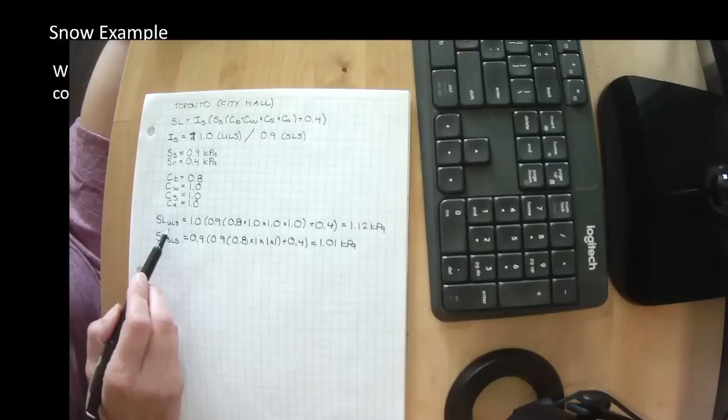Oh, I didn't do my second bracket there. So we have 0.9 times 0.8 plus 0.4. Alright, 1.12 times 0.9. We have 1.01 kPa. So for strength, we would design for 1.12 kPa, and for serviceability, we would use 1.01 kPa.

And why is that? So in that same chart, it gave a 24-hour rainfall value. I think in Toronto, 97 millimeters or something like that, and that's a 1 in 50 rainfall event. I know that in Toronto, regions of Toronto in 2013 got 121 millimeters of rain in 2 hours, far exceeding their 1 in 50 year rainfall event.

It doesn't tend to govern for us here in Toronto because the snow loads are higher, but why do we worry about it? Well, this is the volume of rain in 24 hours. It doesn't matter what the shape of that volume is, it's the same volume. So if we have a roof with a drastic slope on it, that same volume gets positioned like that.

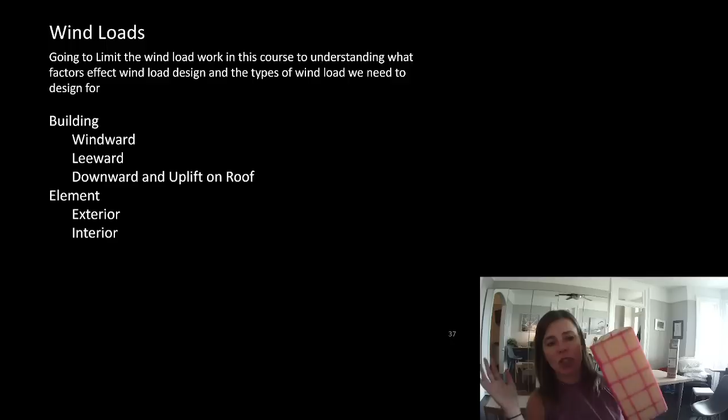Wind loads. We have winds blowing on our building. There's a unique thing that when the wind blows on the building, it pushes on this side, and it actually causes suction on this side. While it's going over the roof, it can cause wind to blow down on the roof, or it can cause suction on the roof. So we look at the building as a whole with those winds pushing on it and pulling on it in the same direction.

We look at the roof for downward loads or uplift, and then embedded in the wind load is something called a gust factor. If you've ever been standing outside and you can see the tree over there blowing really hard with the wind, and then it stops blowing, and then a few seconds later you get a blast of wind on you. Well, that's because localized spots will have really high wind loads.

The idea in a building is that the whole building being designed for the loads might have spots that are seeing gusts, but you're averaging it out over the whole building. That particular element, though, needs to worry about that high gust load, but we don't apply the high gust load over the entire building at the same time. When designing the building, we would just design it for each little element at a time.

The wind load calculation is very similar to the snow load, where Q is the reference wind pressure that we would look up in the climatic data tables the same way we did our snow loads. P is our wind pressure in kPa. IW is our importance factor. Remember, we have two. We have our strength and our serviceability factor.

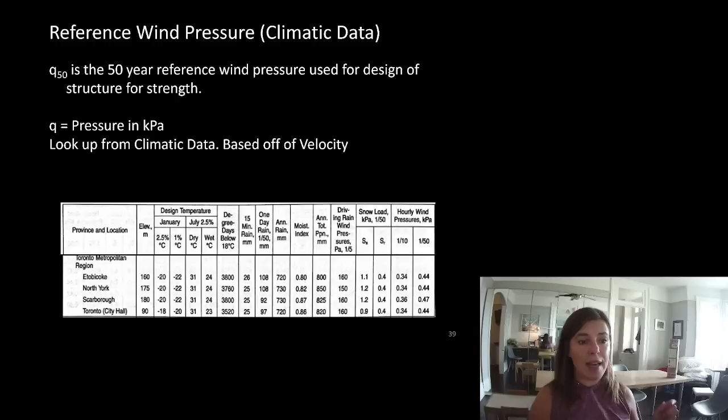The States does it in a slightly different way. They give it in a velocity, which would be like kilometers per hour. We do it as an hourly wind pressure, and they do it as a velocity 3-second gust value. So if you want to work things back and forth between the codes, you do have to go through 2 stages of transferring it. You would need to change the gust to an hourly wind, and you would need to change the velocity to a pressure. Again, we're not going to do any calculations on that.

Interior wind loads. Okay, so inside a building, we do say some wind gets in through the walls of the building, but we also have differential pressure between rooms that's generally caused by an HVAC system. Some rooms get kept under positive pressure or negative pressure relative to the surrounding rooms. That ensures a one-way airflow in or out of a room. So if you have an exhaust system somewhere else, you're forcing your airflow to go in a certain direction. That's really all we're going to look at for wind right now.

And the video I have is my 2 boys this summer standing on one of those yellow swim mats, and my husband literally pulls the mat towards him, and they're both standing there, and they can't stand up, and they fall to the mat. They had a great time doing it. We spent an hour doing that with them, but that is what's happening with seismic load. I tried really hard to get a video of them turning and bracing their feet when he did it, to see that they wouldn't fall over, but they were having so much fun playing the game that they refused to do it.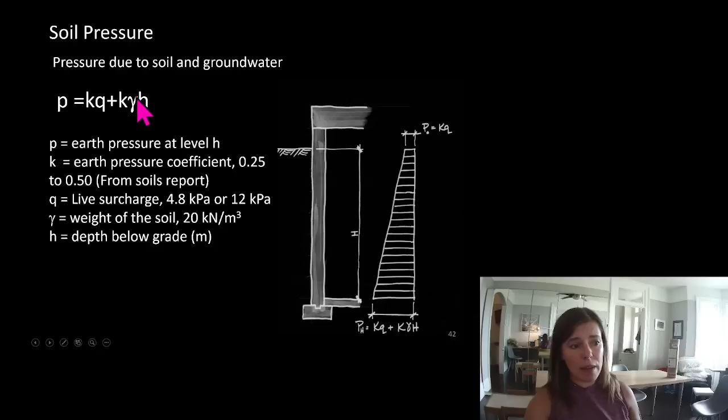So remember I said the further you dig down, the more likely it's going to try to fill in the hole because the weight or the amount of soil above you increases, meaning you have more force trying to fill in the hole. And then H is the depth below grade. So we have two parts. We have the soil stickiness factor times the surcharge, and we have the soil stickiness factor times gamma, which is the weight of the soil, times the height.

Let's take a look at a quick example here. We have a house with a basement. It's a 10-foot basement. The soils report tells us that the earth pressure coefficient is 0.3, so that's K, and the soil has a weight of 20 kilonewtons per meter cubed. That's gamma. Assuming there is a laneway adjacent to this house, we know our surcharge should be 12. What is the soil pressure at both the top and the bottom of the wall?

So let's make my calculation pad bigger here for you. So let's look at pressure. So we have soil here with a wall of some sort. And we know that there can be a fire truck here. This dimension is 10 feet. Well, right away, let's transfer that into meters. Let's just make that meters right away.

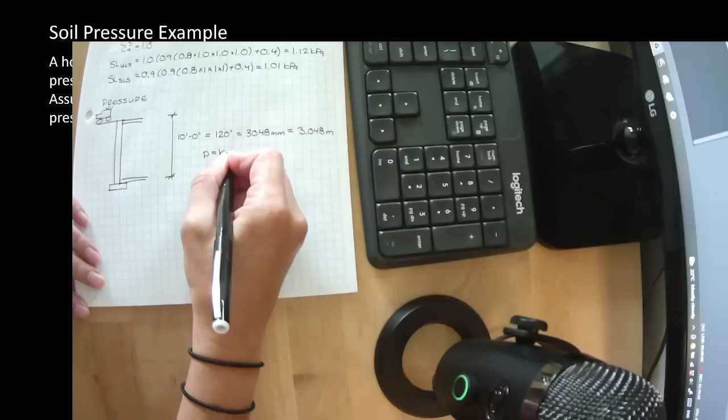So we know that that height is 3.048 meters high. We know that the equation for pressure of the soil is KQ plus K gamma H. They have told us that K equals 0.3. We know that Q, which is the surcharge, is 12 kPa because we have a laneway, so we could have fire trucks there. We know that gamma equals 20 kilonewtons per meter cubed. They gave us that in the question.

And H1 is at the top, so 0. So let's call that top, and H bottom is 3.048 meters. So this is H at the top, and this is H at the bottom. Let's calculate P at the top. We have K equals 0.3 times our surcharge plus our K times our gamma times our height. Well, the height at the top is 0, meaning we have 0.3 times 12, or 3.6 kPa.

Let's look at the P, or the pressure, at the bottom. So this is the force trying to push in on our wall. We have 0.3 times 12 plus 0.3 times 20 times our 3.048 meters, or 0.3 times 12 plus 0.3 times 20 times 3.048. We have 21.9 kPa. So that means this pressure, I'm going to use a different color here. The pressure trying to push in on this wall varies from 3.6 kPa all the way down to 21.9 kPa.

Do you remember that our snow load was 1 kPa and our live load assembly loads was 4.8 kPa? Soil is a gigantic load, and it's everywhere, all the way around the base of this building. This is one of the reasons we like to do our foundations in concrete.

So let's bring this back up here to me. I'll make me smaller. How are we doing for time? Woohoo, tight. Okay, here's that worked out again.

There are a few other types of loads that we worry about. Temperature. Most of you know that things expand when they're hot and they contract when they're cold. It's not often that we have to worry about this because most buildings are of a scale that it's not something to be concerned about. But on large scale buildings, or buildings where we have part inside and part outside, or structure that is outside. Normally we're inside an envelope, so it doesn't really matter.

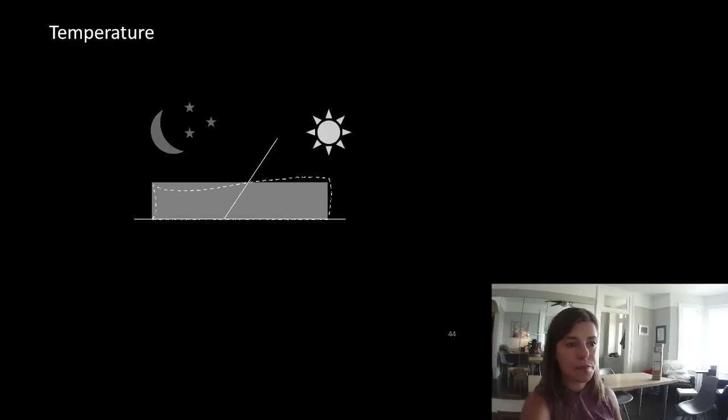Pre-stress. Pre-stress is when we tighten something to prepare it to take load. So if we pulled my elastic tight, for example, somebody could push on it. And rather than it buckle, we would just unload it until all of a sudden we got to the point where it would buckle. If anyone has tried to use one of these saws without this handle pulled tight, the saw blade buckles when you're trying to use it. That act of pulling it like that is what causes this to be pre-stressed so that you can use it.

Vibration. Vibration is something that we worry about. It's mostly about people's perception of how the building feels. So we don't spend too much time on it for most elements in a building. We worry about continuous vibration, which is people moving around. I talked about this last week. Or damping, which is where we have an impact load that shakes out through the building. We do worry about it with amplification, though. Amplification can be a life safety issue, but it's under very specific circumstances.

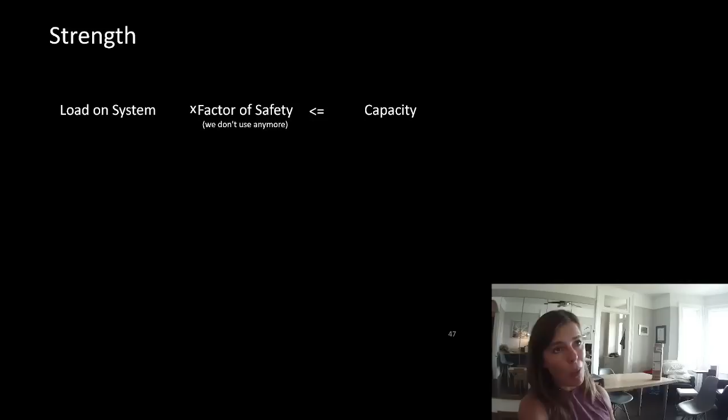So you guys remember, the load on the system times the factor of safety needs to be less than or equal to the capacity. We factor up the load, and we reduce our capacity, and that factored load needs to be less than the reduced capacity. And that little symbol F means we factored it, and that little symbol R means we've reduced it. That is called limit states design.

Our strength is our ultimate limit states design process, or ultimate limit states. So that is all about life safety. If you see ULS, we're talking about life safety. If you see SLS, we're talking about deflection, not about life safety. It's about preservation of finishes and comfort levels. So if we have a disaster, we don't care so much if some drywall cracks. We want everybody to stay alive.

So what are the importance factors?

I have a feeling I'm going to go over a little bit today, team, and I apologize about that. I'll try not to do that going forward. I know your time is valuable and precious. Feel free to, if you don't need to make use of the entirety of the tutorial, listen to some of this during the tutorial time slot as well. The tutorial used to be taken up a lot with going through the answer sheets, but I now provide you with the answer sheets for the quizzes and the assignments. So that might cut some of the time that you might have needed in the tutorial that you could take up by watching some of this.

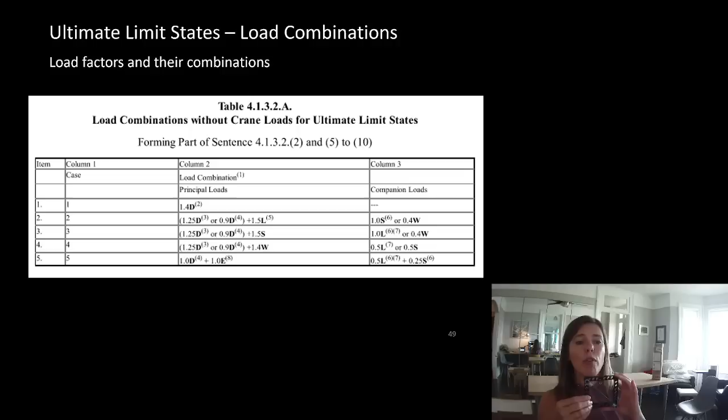And if I take away 1.25 times the dead load, I could be overestimating the helpful benefit of the dead load on tension for this brace. Those are the conditions where we would use 0.9 times the dead load. If we think the dead load is helping our load and not letting us look at the worst case value, because remember, we want to make sure the worst case factored load is less than the capacity. So we're going to figure out all these load combinations to find the worst case one.

Figured out how I'm going to handle some of this. Okay, so let's take a look. Load combinations. We can have 1.4 times the dead. We can have 1.25 times the dead plus 1.5 times the live. We can have 1.25 times the dead plus 1.5 times the snow load. We can have 1.25 times the dead plus 1.4 times the wind load. So this doesn't have any companion loads. These are just the principal loads.

Well, we could also then have the companion loads. If I have live as the principal load, I could have snow as a companion or wind as a companion. If I have snow as the principal load, I can have live as the companion or wind as the companion. If I have wind as the principal load, I can have live as a companion or snow as a companion load. And then, what if I have a condition where I have wind causing uplift on it, and I don't want to assume I have more dead load, because then I could be underestimating the tensile load on something.

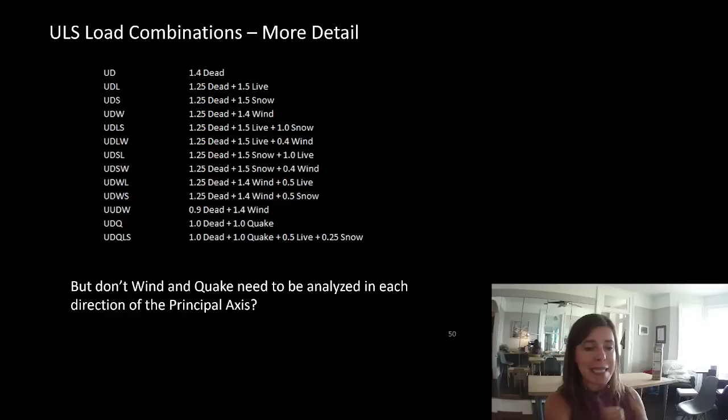But what about the fact that wind and earthquake need to be analyzed in each direction of the principal axis? So we can have wind going in this direction, and we can have wind going in this direction, or in this direction, or in this direction. That means for every wind case, we actually have 4 wind cases. And for every seismic load case, we actually have 4 seismic load cases. So we have to add all that in.

This doesn't even take into account that when we design seismic and wind, we actually put a little bit extra load on the ends sometimes to account for the possibility of it twisting. So we would actually have end zones, wind and earthquake loads that we would worry about, which means for every one of these wind cases that we already have, we'd have double. And for every one of these earthquake loads we'd actually have double.

I have done projects where I have had 1,250 load combinations I needed to worry about. And every member of the entire building needs to be checked for bending, shear, and axial loads for all 1,250 load combinations. That's an insane amount of bookkeeping. That's why software helps us out a lot, and knowing what might be the worst load case.

We also have serviceability limits. So, serviceability for roof deflection, we would have our dead load plus our snow load. But remember that this snow load, we would need to be using our SLS snow load, which had the importance factor of 0.9 applied. So it's not our ultimate limit states snow load, but our serviceability limit states snow load that we would have already calculated.

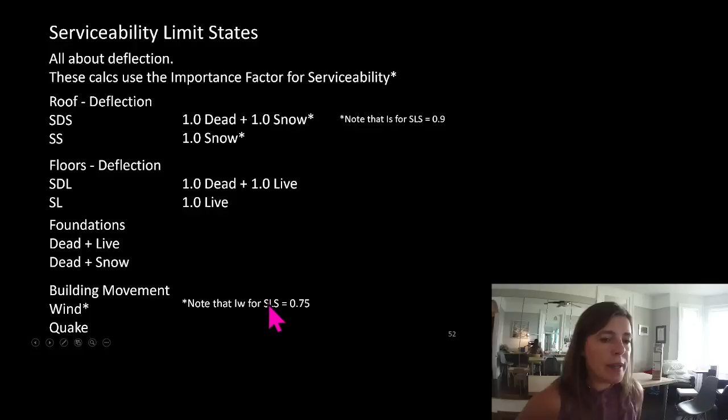We're going to do one example where we look at the load combinations on an element. We're not quite sure what the element is, but they've told us that it could see dead of 12 kilonewtons of compression, live 10 kilonewtons of compression, snow 5 kilonewtons of compression, or wind with 10 kilonewtons of compression or tension. We want to look at our factored loads, or ULS, and our serviceability, or SLS, load combinations.

So let's do that quickly, and then I will wrap up this lecture, and then I'll treat tributary area as a tutorial time slot component that you guys can watch. You don't have to watch it during your tutorial, you can watch it separately, but we will have elements on the assignment and the quiz that will touch on the tributary area and tributary width. I used to not even do the next component in the lectures, but because most people intuitively know it, there were enough people I found over the years that really struggled with that basic concept that I decided to make it a whole little module within a lecture time slot. But we don't have that many lecture time slots, so I've got to try to jam these things in.

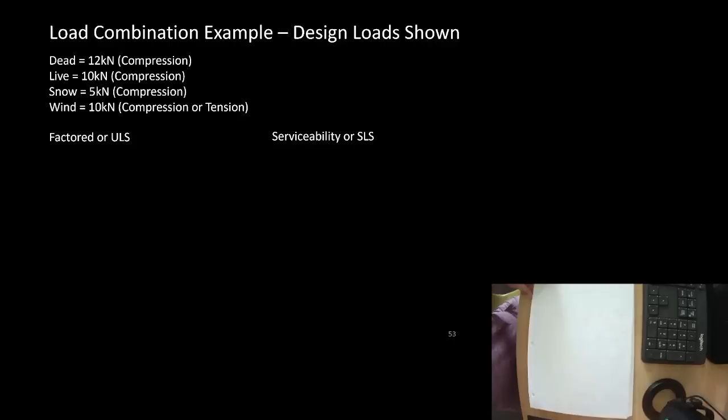So let's take a look at this load combination situation here. So we'll do this, and then I will make another video about our tributary areas and tributary widths. There. Okay, that's a little bit better. All right, so I will make us big here. All right. So like I said, this could be a much shorter lecture, but I think examples are really, really important, and I don't want to deny you that.

So let's look at our factored combinations, or our ULS combinations. Well, we have our ultimate dead case, or 1.4 times our 12 kilonewtons, our ultimate dead live, or 1.25 times 12, plus 1.5 times 10, our ultimate dead snow, or 1.25 times 12, plus 1.5 times, what's our snow? 5.

Ultimate dead wind, and I'm going to do just the downward forces for right now, plus 1.4 times 10. I think you can see at a glance that this one's probably going to be the worst case one. Normally I would plug all these into my calculator, but we're running low on time. So I'm going to just start filling these in. You can plug these in if you'd like.

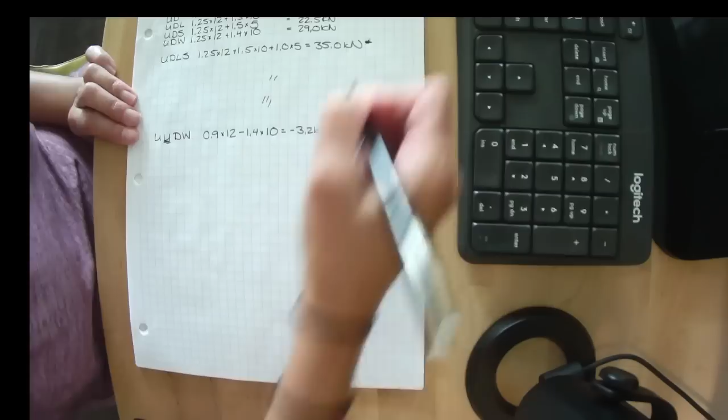In all of the other cases, we had downward loads, and this one ended up being the worst case. You can see it, they're all worked out in the slide. And upwards, this is our worst case. So our worst compression, or our factored compressive load, is 35 kilonewtons. And our worst tension load, or TF, remember, compression is squashing, tension is pulling. Our worst tension load is 3.2 kilonewtons.

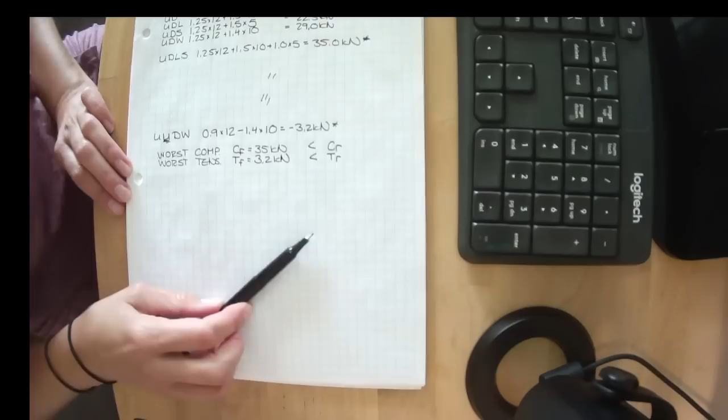So we will need this to be less than CR, and we will need this to be less than TR. I'm going to stop writing the equals to because nobody ever writes that, but this is what we're saying. We need to now figure out the compressive resistance and the tensile resistance and make sure they're greater than our factored loads.

If you jump over to the serviceability portion of this, you can see that this is all worked out here. You can see all those steps. For serviceability, remember, all the factors were 1, but we needed to use our importance factor of 0.9 for our snow load and 0.75 for our wind. We were assuming that it was a regular building because there was nothing telling us otherwise.

So we would take that load we were given and reduce it by 10% here and by 25% here. And that would allow us to figure out our serviceability limit states loads on that same element. Now, for serviceability, it's not about picking the worst case element. We're comparing it to a specific criteria for that load case. Remember, we had a different criteria for dead and snow together than we did for snow all by itself. So it's important that we compare these to different criteria.

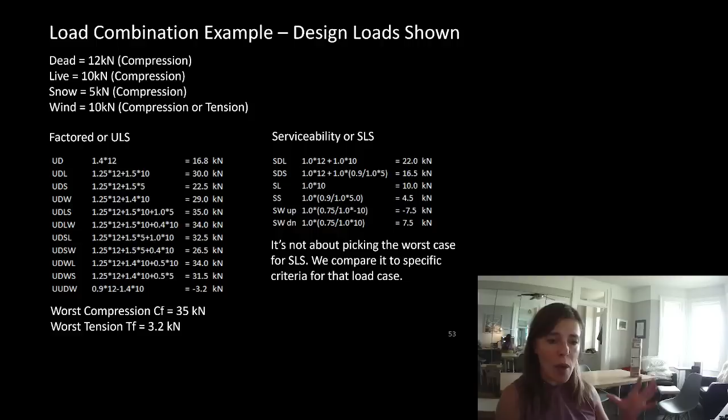You're saying compare it to what? I don't understand what she's talking about. I know. We'll get to that later on. We have to do this in steps. But I've given you the means now to figure out what your factored loads are and what your serviceability loads are. Sort of. I mean, the ones I'm giving you are not going to be that hard. I'm not going to make it wild and crazy on you. It's going to be something very similar to this. But you can see now that we are factoring different things.

Okay, so we're definitely over, and I very much apologize for that. I am going to do, as a tutorial component, tributary areas and widths. So I will do this. It's just a few slides. I'll do that as a little separate mini video to talk about tributary area and width.

So the things you'll need to know is how to look up your live load based on the building and room type, how to look up your dead load once you know what the assembly is. You should know that snow and wind and seismic are based on statistic probability and how to calculate snow if I give you a chunk of information. You should know that soil, temperature, pre-stress, and vibration loads exist. You should know that loads are combined and factored for the worst case ULS, and we look at SLS. And then we will talk about the tributary area for elements in a tutorial segment. And you should have a general idea of what structural drawings look like.

So I know this was a lot of information, but I like to think that it's because I am providing you more information. I used to do this lecture in exactly an hour and 55 minutes, so that just means I've given you more information. So in one side I apologize, on the other, you're welcome for the extra information.